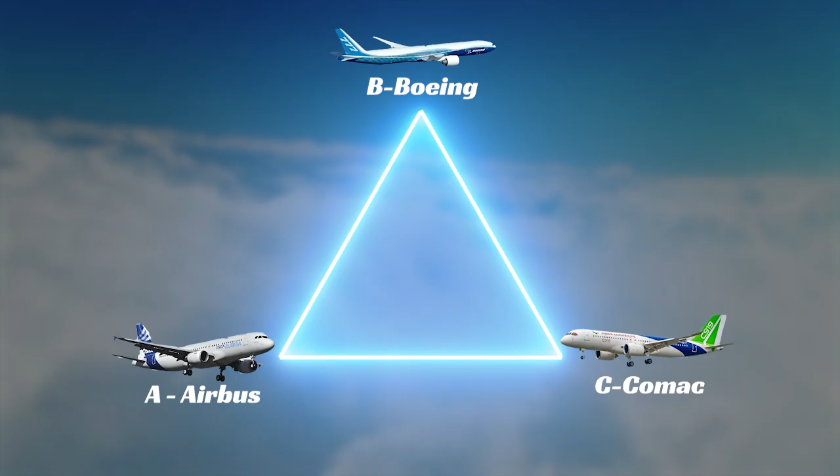China has set its sights on becoming a global powerhouse in commercial aviation, aspiring to establish COMAC, Commercial Aircraft Corporation of China, as the C in the new ABC world order, alongside Airbus and Boeing. This ambition is no longer just a vision, it's taking flight.

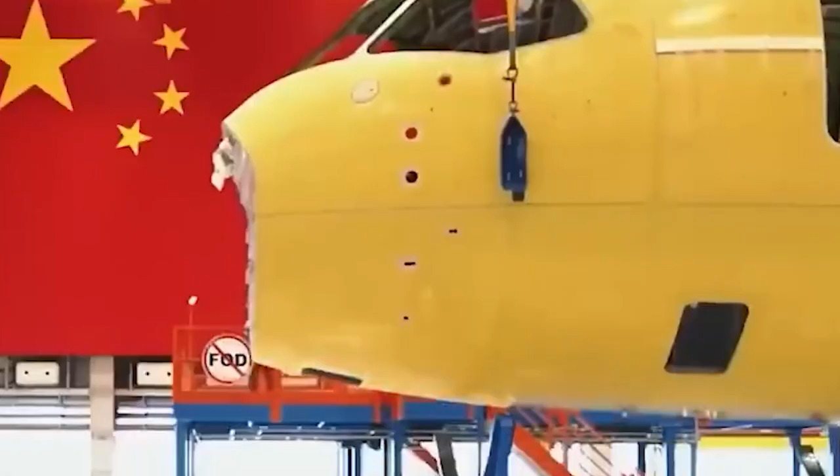The COMAC C919, a modern narrow-body airliner, designed and assembled in China, stands as a powerful symbol of this progress. Certified, operational with airlines like China Eastern Airlines, and backed by over 1,000 orders, the C919 represents a monumental achievement in China aerospace engineering and industrial capability.

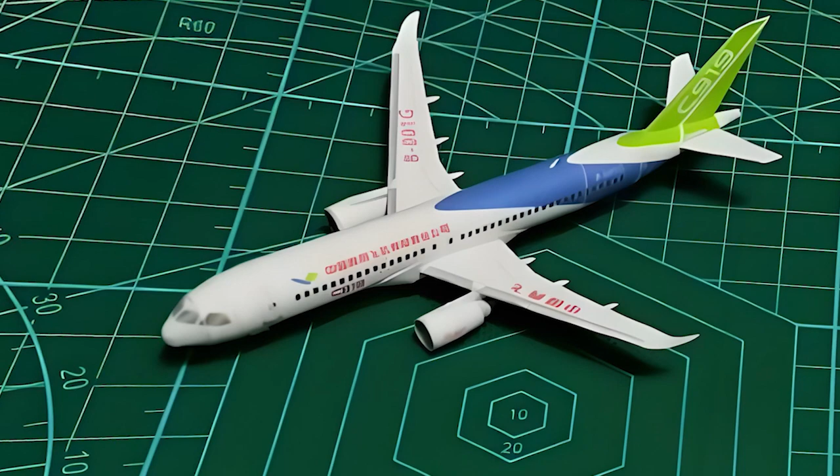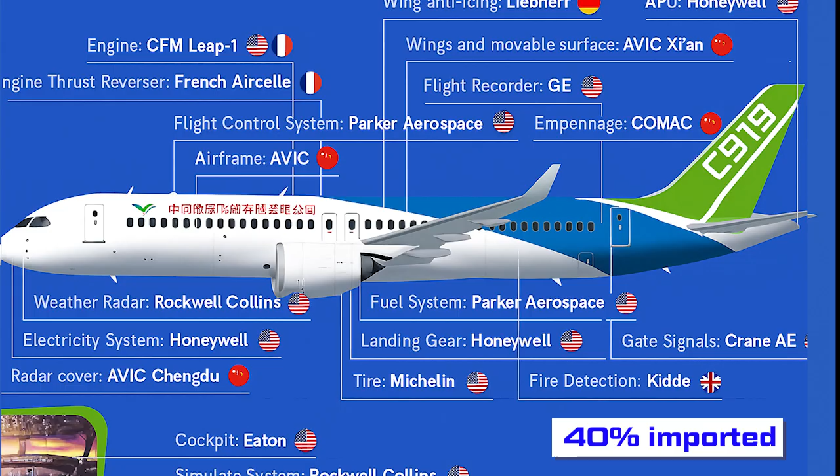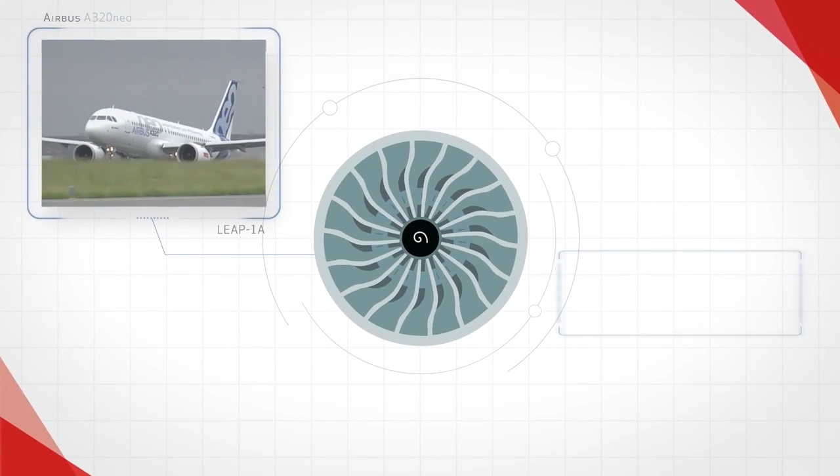Yet, beneath the triumph lay a critical flaw. While the C919 features a Chinese-designed airframe, about 40% of the model's components are imported. The C919 depends entirely on LEAP-1C engines from CFM International, a joint venture between GE Aerospace from the US and Safran Aircraft Engines from France. This strategic dependence leaves the program acutely exposed to geopolitical tensions.

In May 2025, President Donald Trump issued a ban prohibiting the export of key US aircraft engine components and technologies to China, directly targeting the LEAP-1C engines powering the C919. This move threatens to disrupt the jet production, as well as the obtaining process of international airworthiness certification.

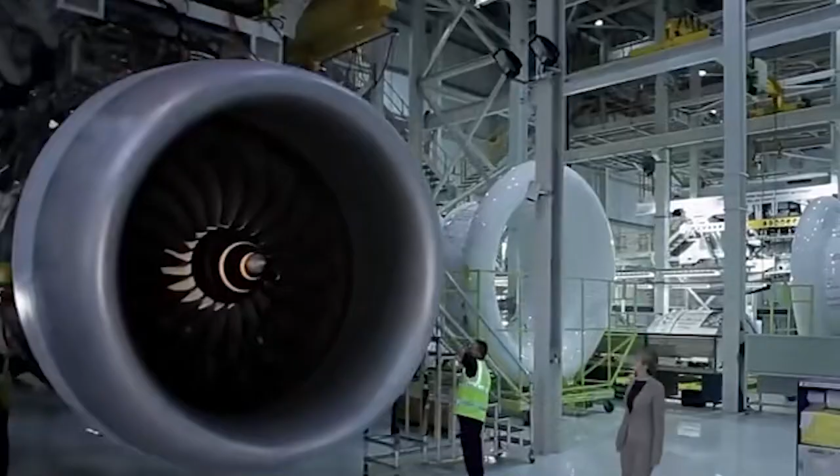But does this come as a surprise to China? The answer is no. China has anticipated this scenario from the beginning. While developing the C919, it simultaneously pursued development of the CJ-1000A engine.

The decision to initially use foreign engines was a strategic choice, one driven by several key considerations. First, there was a matter of international certification. For the C919 to succeed globally, it needed a proven Western engine. This gave it credibility from day one, making airlines far more comfortable placing orders, allowing COMAC to build a customer base and gain operational data while continuing the CJ-1000A development.

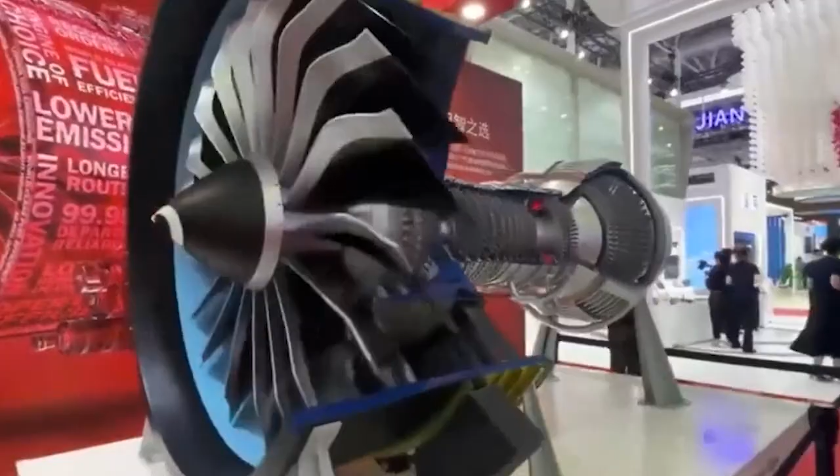Another major factor was minimizing risk. The LEAP-1C was already a mature, high-performance engine, with a proven track record on other aircraft, significantly de-risking the C919's initial entry into service.

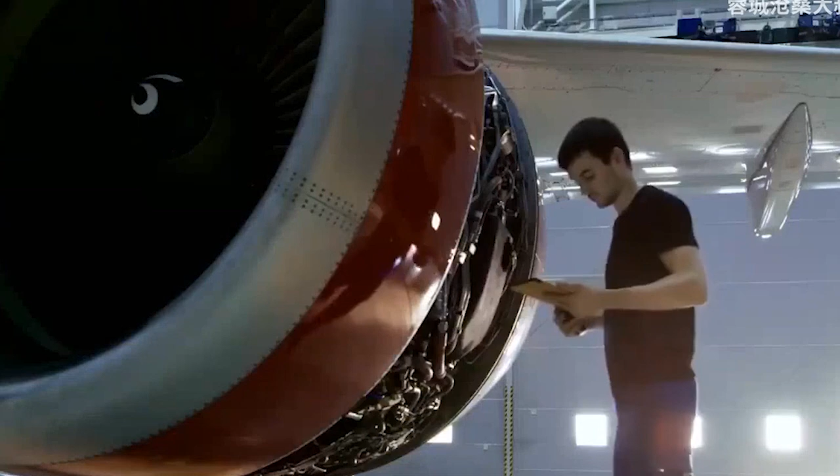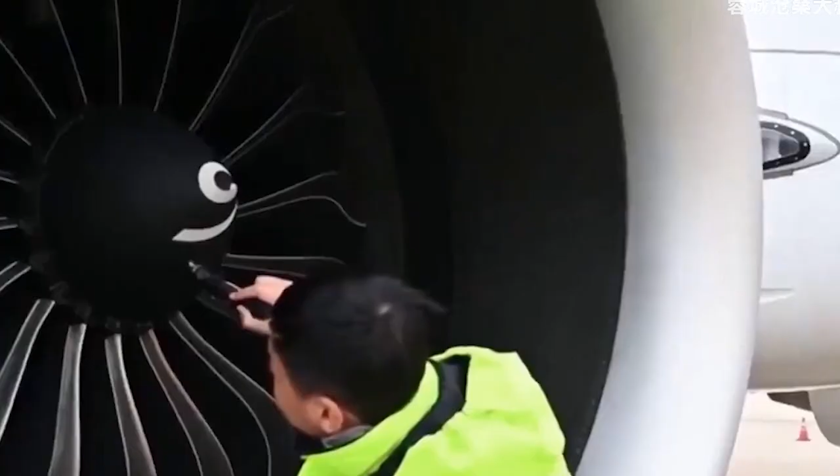There was also a long-term industrial benefit. Even without formal technology transfer, working closely with companies like CFM provided Chinese engineers invaluable exposure to the best practices in the world. This hands-on experience accelerated their own domestic engine building capabilities.

And finally, there was a geopolitical aspect. Choosing a Western engine initially helped avoid provoking the very type of trade restriction that materialized in May 2025. Contrary to common beliefs that China is dependent on foreign technology, importing foreign engines represented a rational choice within a broader commercial and strategic roadmap towards self-sufficiency, not a lack of alternatives.

So, how far along has China come? Let's take a look at the progress of the two engines, the CJ-1000A for the C919 and the CJ-2000 for its larger sibling, the C929.

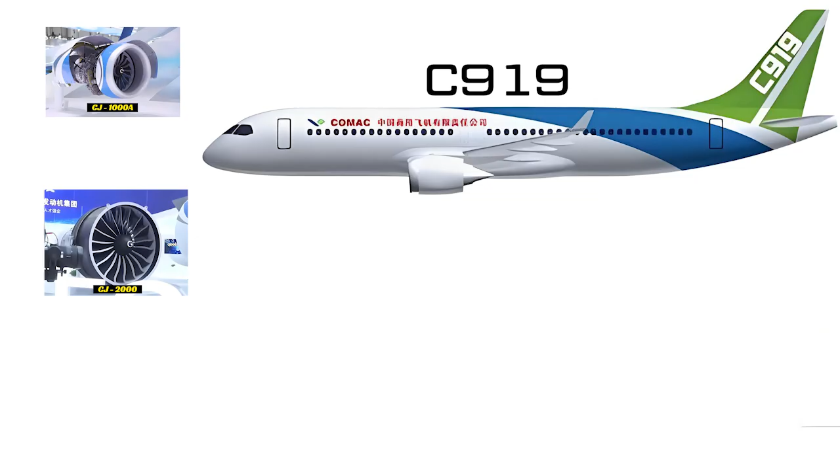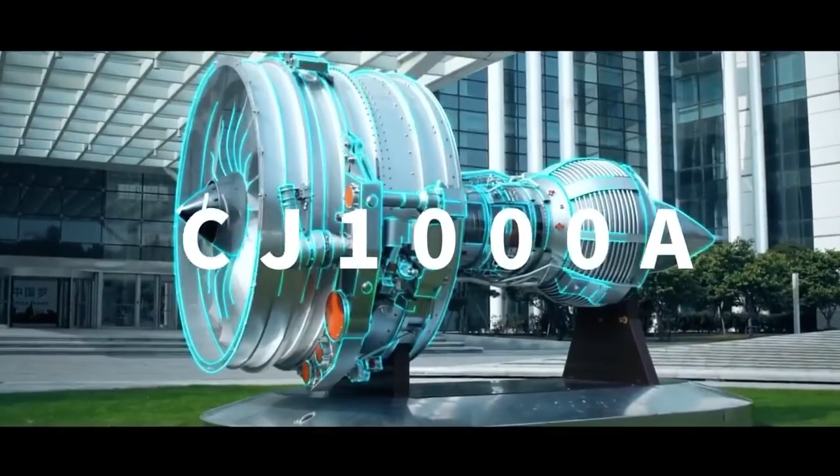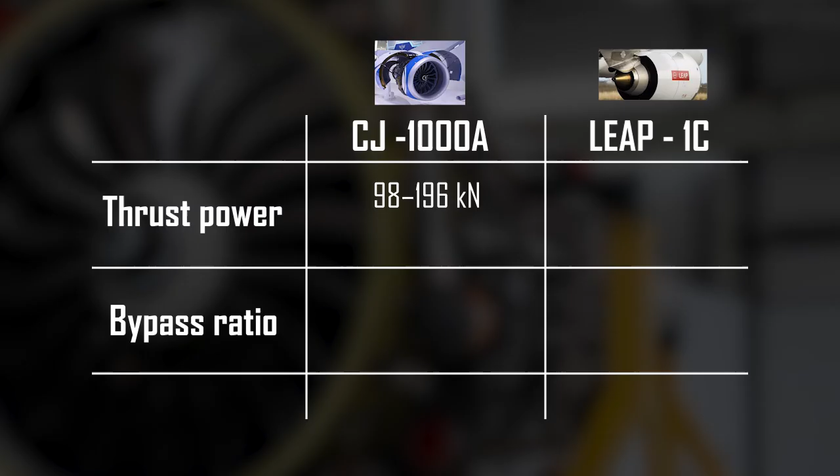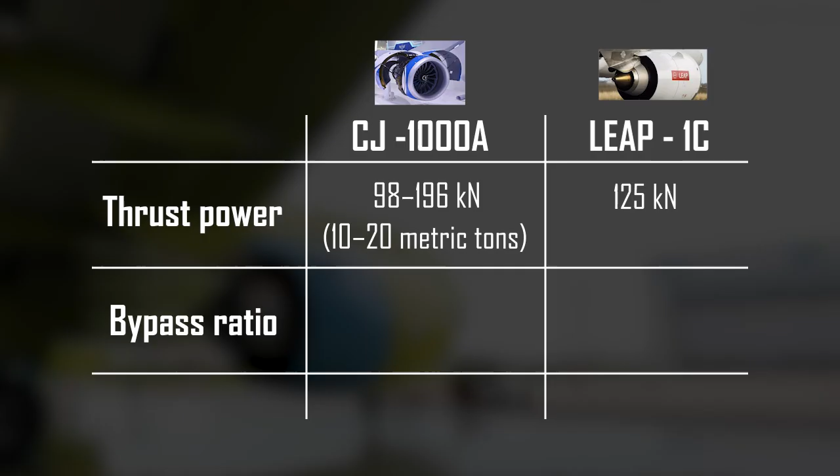The CJ-1000A is China's first domestically developed large high-bypass turbofan jet engine, capable of generating from 98 to 196 kN of thrust, around 10 to 20 metric tons, placing it in the same class as LEAP-1C, with the 125 kN of thrust, approximately 12.75 metric tons. The CJ-1000A has a bypass ratio of 10:1, compared to the LEAP-1C 11:1.

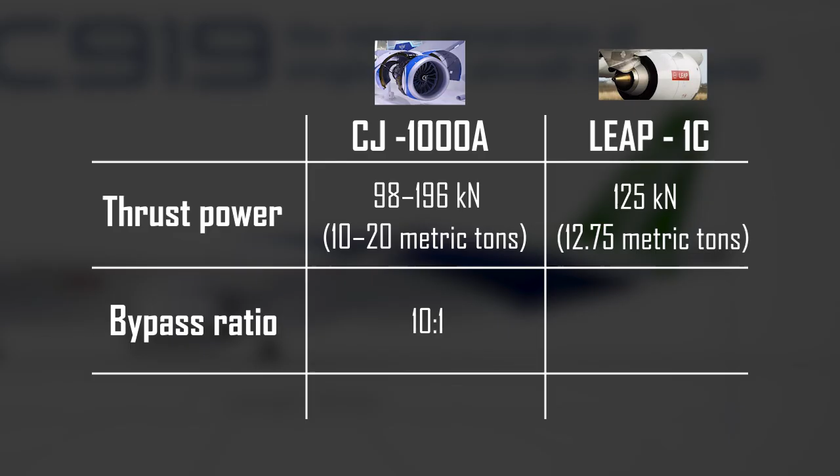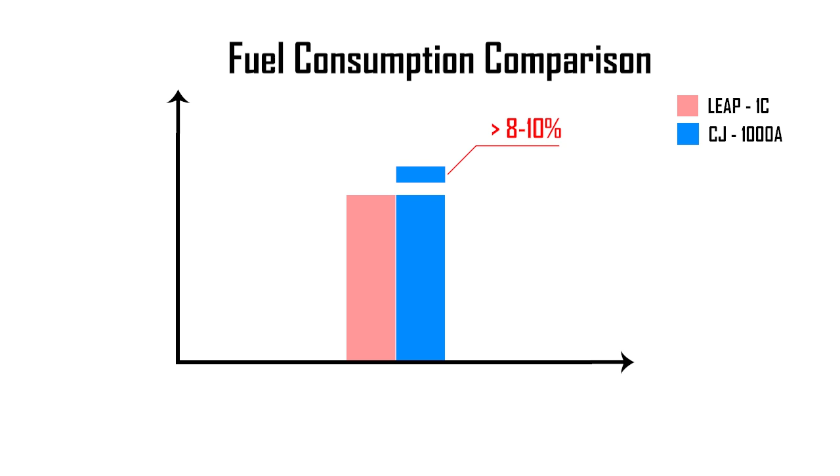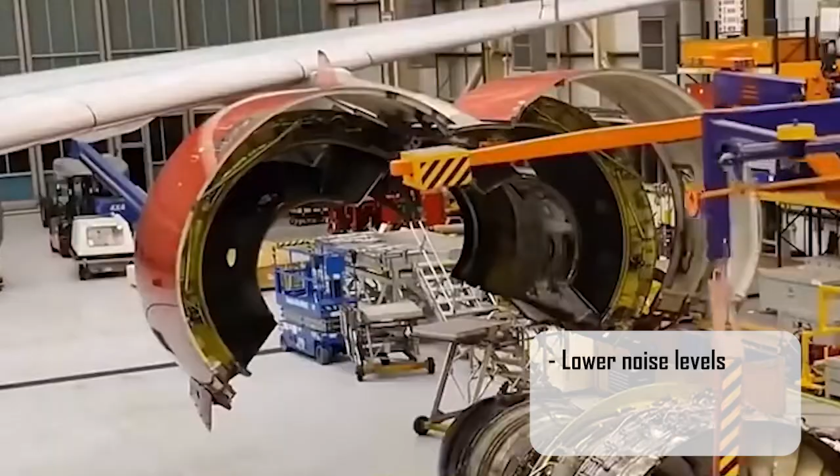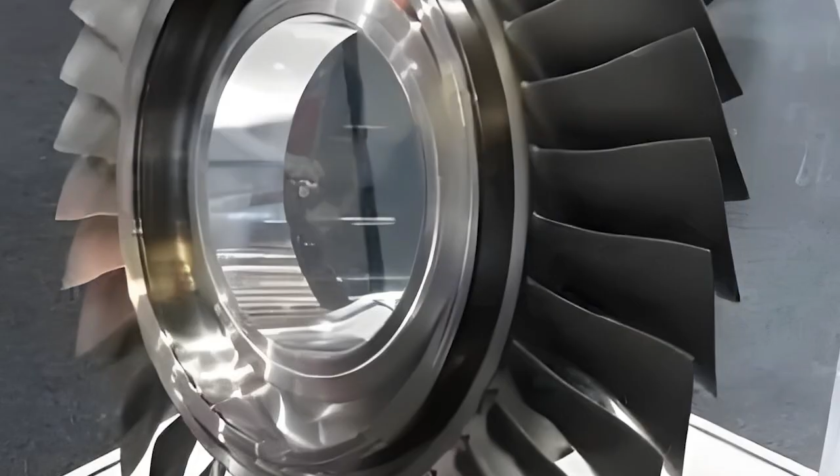While a higher bypass ratio typically improves fuel efficiency, the CJ-1000A fuel consumption remained approximately 8 to 10% higher than the LEAP-1C due to its earlier development stage. However, it achieved lower noise level through advanced acoustic liners and optimized fan design. Key parameters like thrust-to-weight ratio and noise control approach international standard, with notable progress in single crystal turbine blades and FADEC full authority digital engine control systems, technology that were once strictly embargoed by the West.

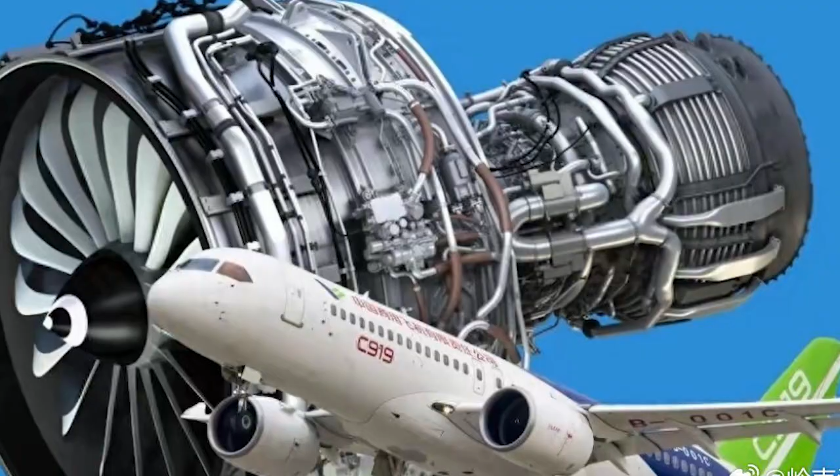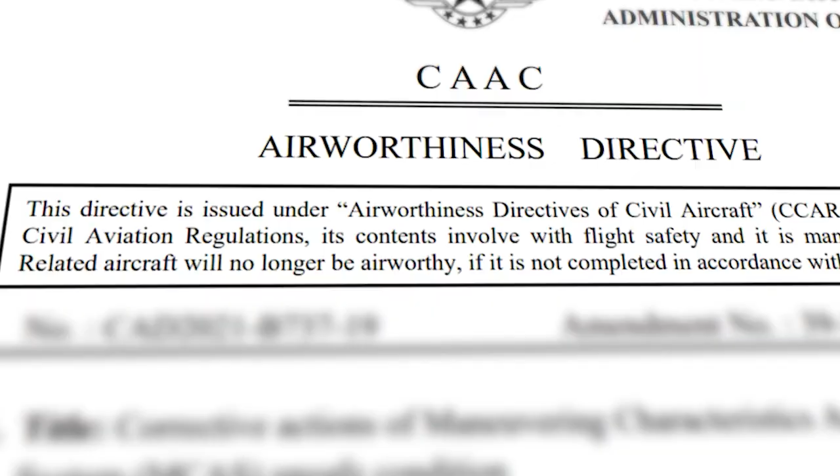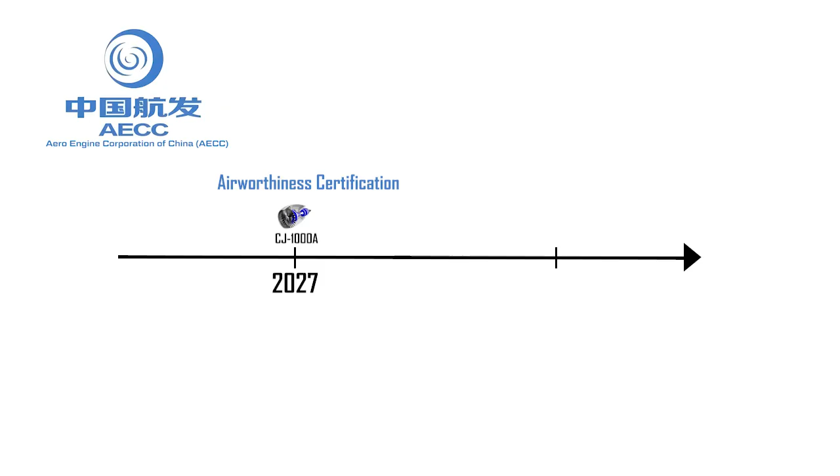According to domestic media reports, the CJ-1000A has passed the Civil Aviation Administration of China's certification, or the CAAC certification, production license, and individual aircraft airworthiness testing. It is now in the final stage of the airworthiness certification. Some core components have reportedly operated without failure for over 1,000 hours. AECC expects the CJ-1000A to receive the certification by 2027 and enter commercial use by 2030.

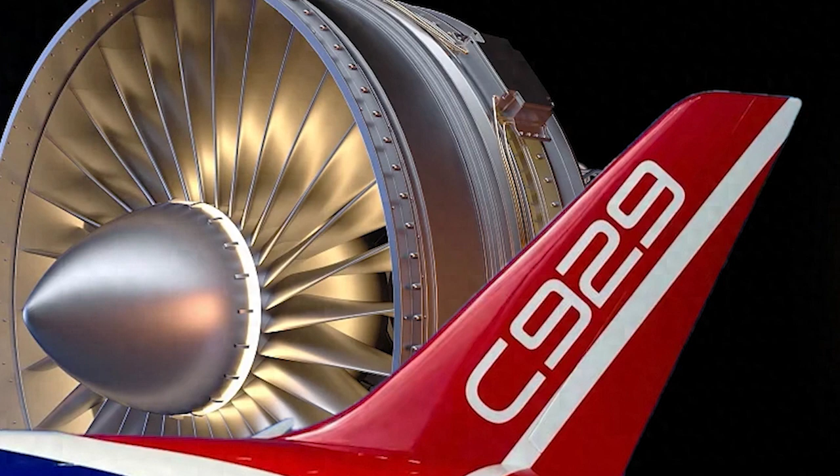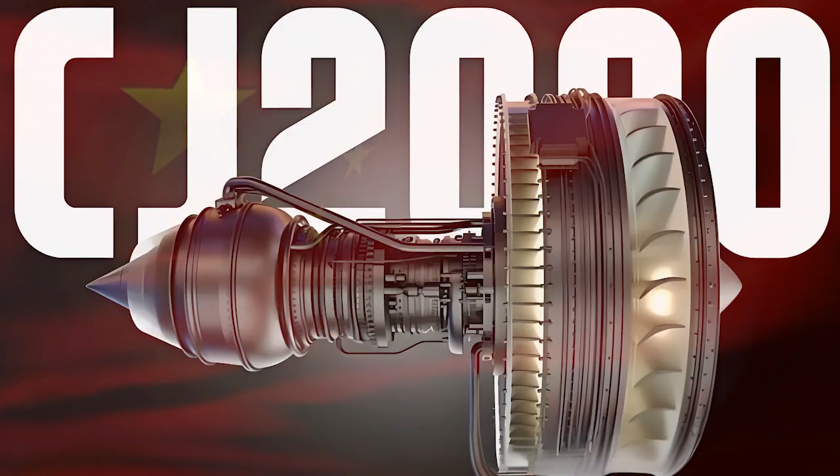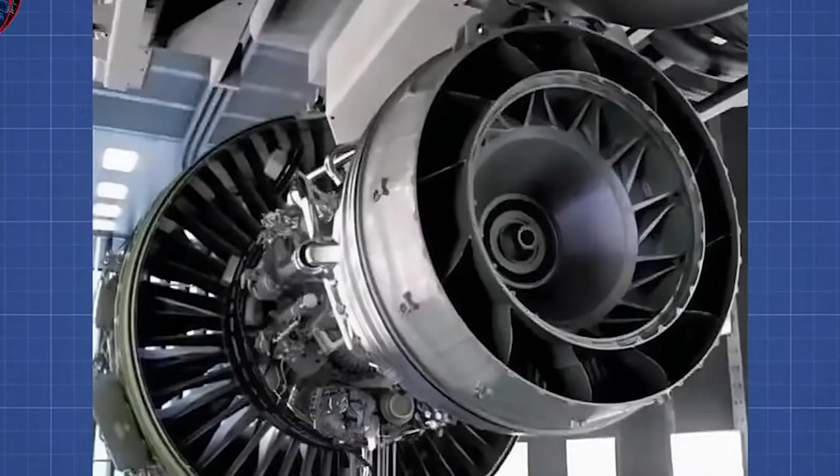Beyond the CJ-1000A, China's CJ-2000 aviation engine has achieved pivotal breakthroughs, where the CJ-1000A resolved critical supply chain vulnerability. The CJ-2000 represents China's declaration of readiness for head-to-head global competition. The CJ-2000 engine is China's first large, high-bypass turbofan engine, developed entirely domestically.

It is designed to power the C929, a twin-aisle aircraft capable of carrying up to 440 passengers, with a maximum range of 12,000 kilometers, roughly equivalent to the distance from Shanghai to New York. The C929 is intended to compete with the Airbus A350-900 and the Boeing 787-9 Dreamliner on long-haul routes.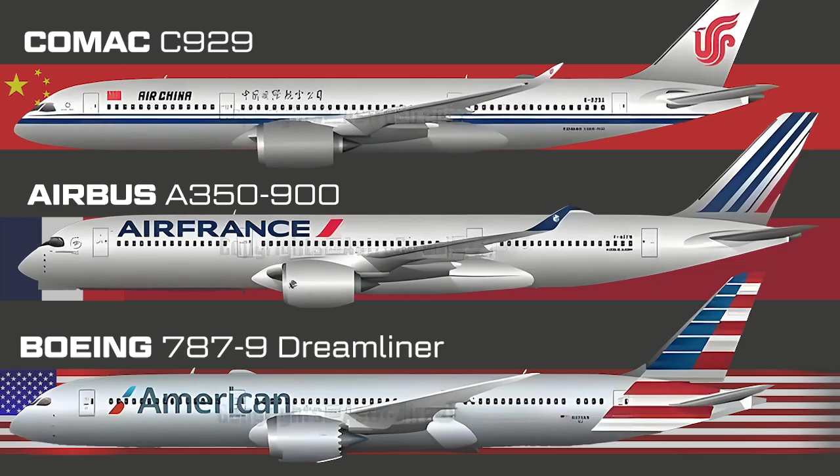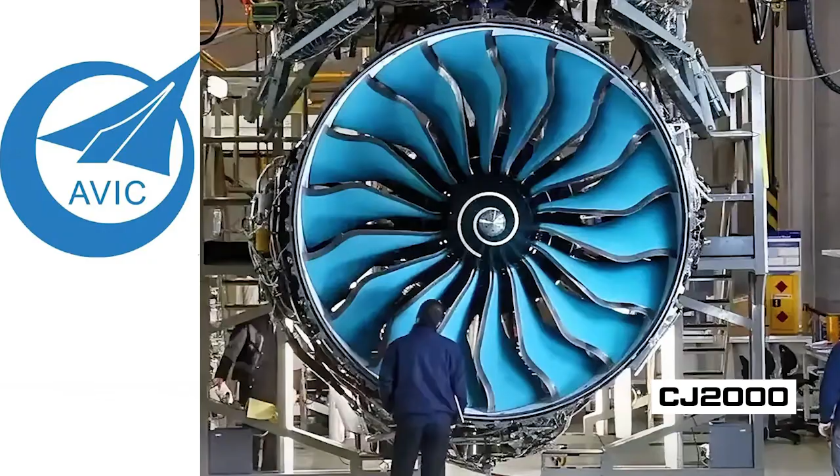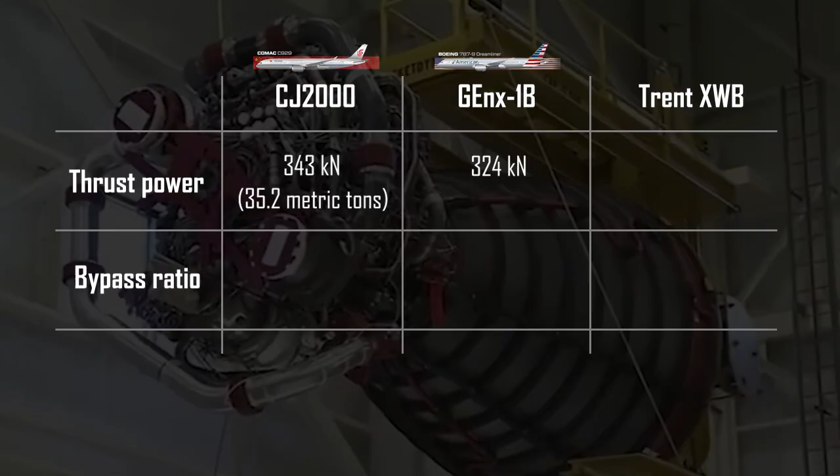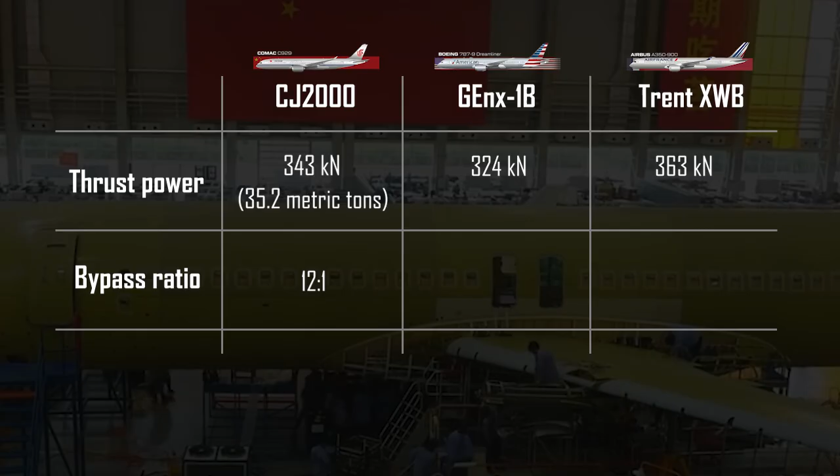In February 2025, the Aviation Industry Corporation of China, AVIC, announced that the CJ-2000 has successfully completed a rigorous 3,000-hour endurance test. By generating 343 kN or 35.2 metric tons of thrust, the CJ-2000 surpasses the GEnx-1B engine of the Boeing 787 and approaches the output of the Trent XWB engine of the Airbus A350. Its industry-leading 12:1 bypass ratio outperforms both of the Western engines, delivering superior fuel efficiency alongside competitive power.

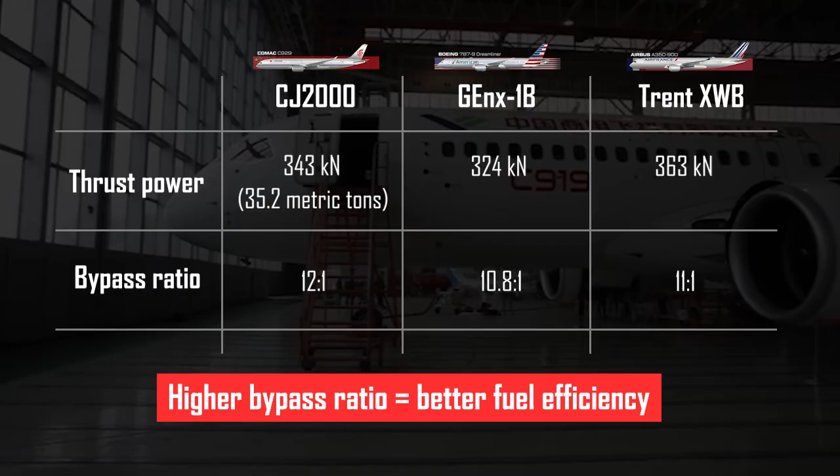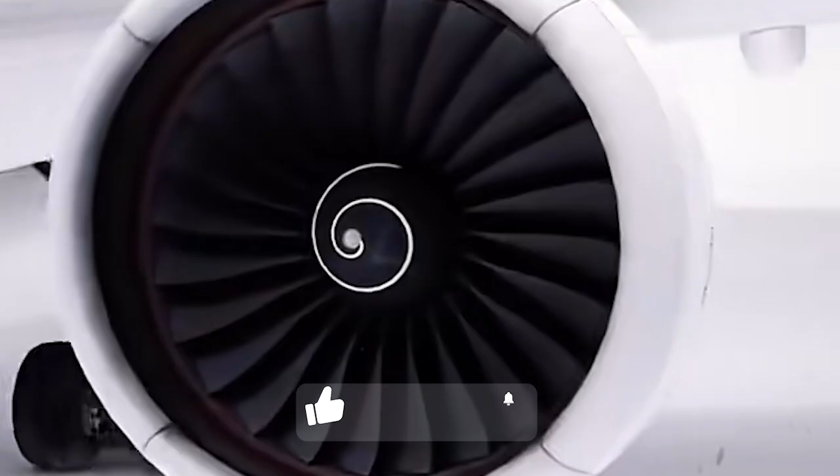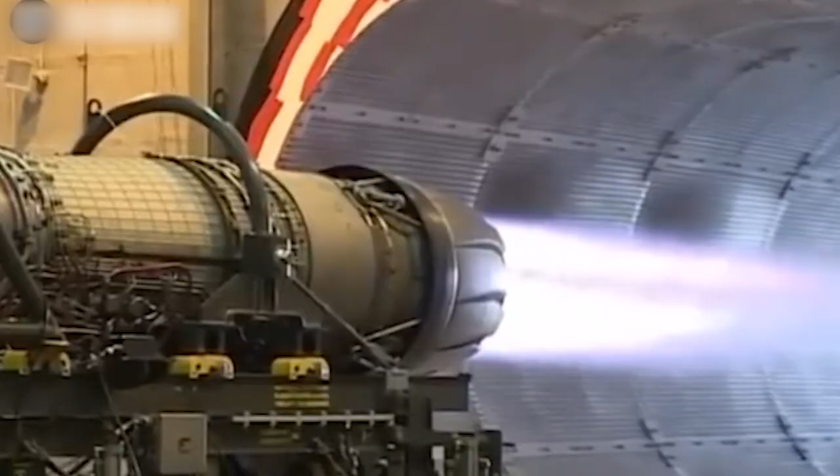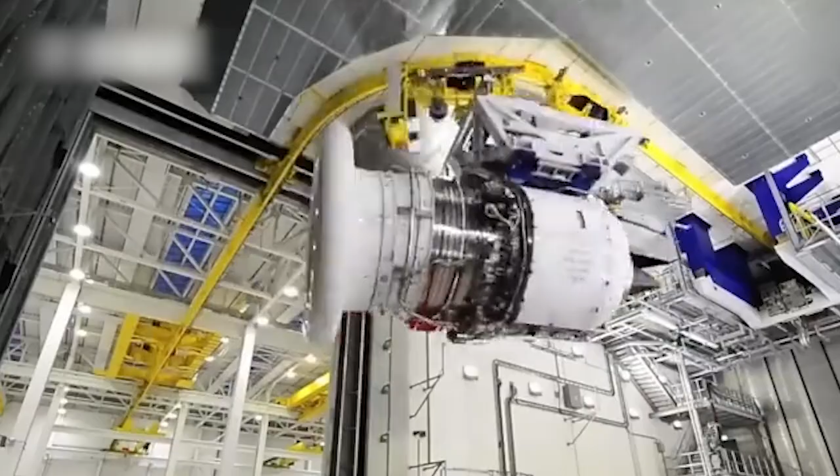However, the CJ-2000's most critical breakthrough is its turbine blade technology. For decades, China's jet engines relied on imported turbine blades, components enduring temperatures hotter than volcanic lava while spinning at supersonic speed. These foreign blades arrive at a staggering 30% defect rate, causing frequent failures, grounding aircraft, and exposing China's aviation ambitions to the mercy of global suppliers.

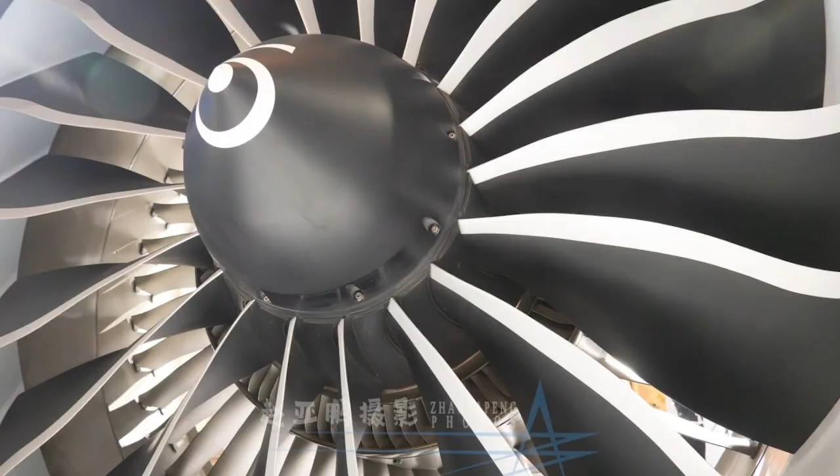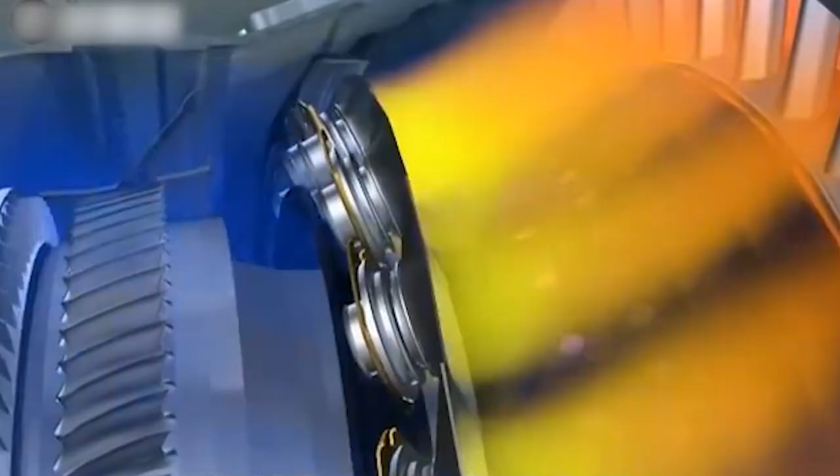The CJ-2000 engine changes everything. Its domestically developed high-performance blades, forged from single-crystal superalloys and protected by advanced thermal barrier coatings, operate reliably at temperatures as high as 1700 degrees Celsius, a staggering 200 degrees hotter than their predecessor. This extreme heat tolerance is revolutionary.

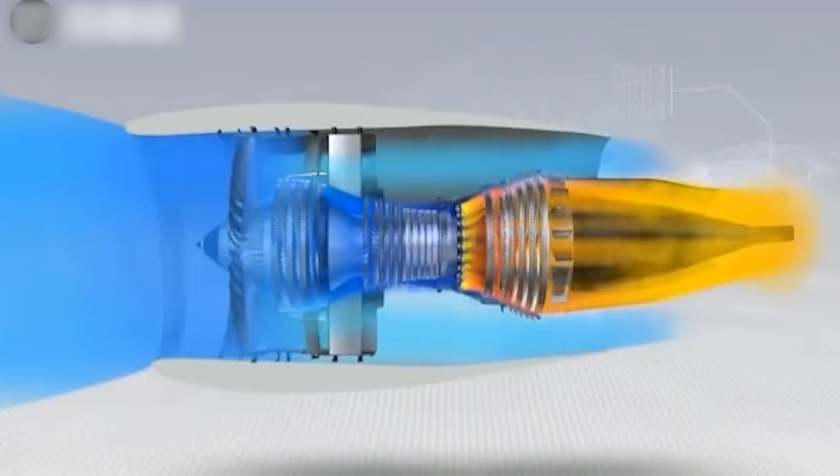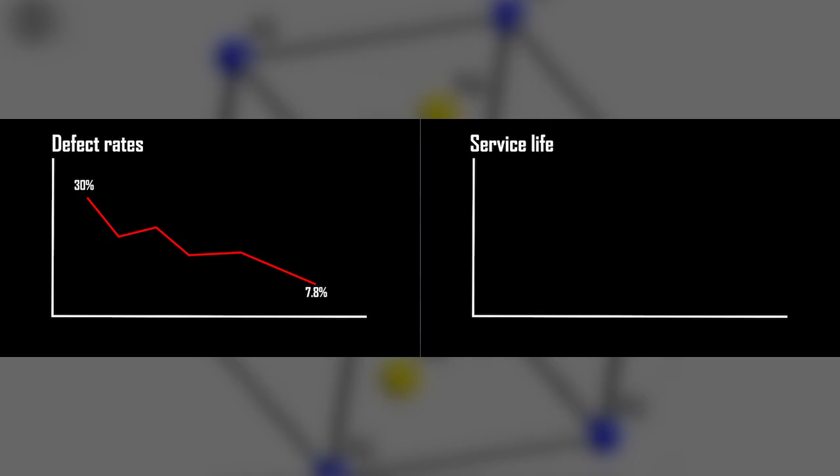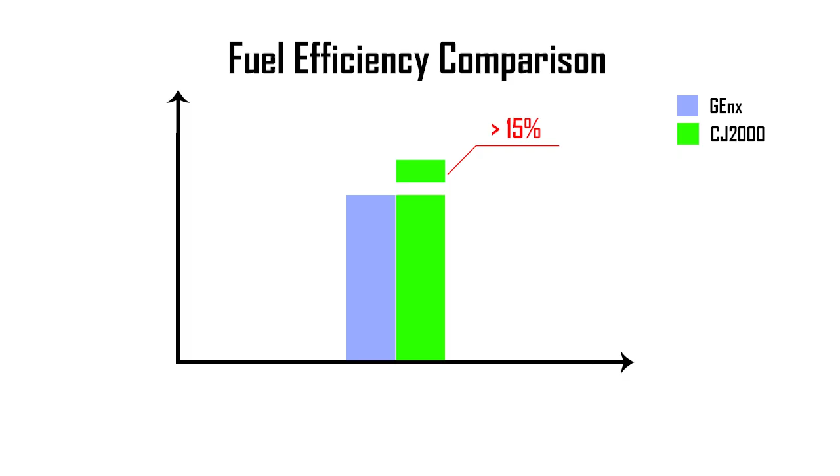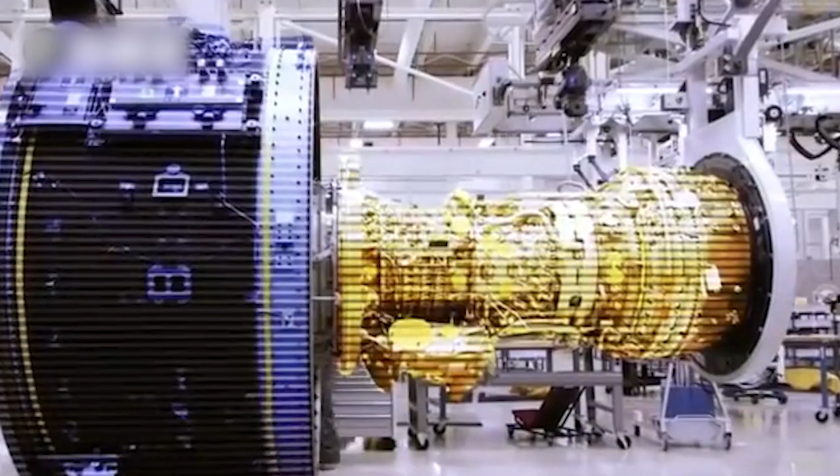It has slashed defect rates from 30% to just 7.8%, while extending service life by more than 80%. According to Aviation, the CJ-2000 now offers 15% better fuel efficiency than the GEnx engine on the Boeing 787. With this level of thermal resilience, these blades maintain precision even under extreme weather conditions. And thanks to their extended lifespan, maintenance costs are reduced by millions per aircraft annually. The gap between CJ-2000 and leading global engines is now minimal, and in some areas, the CJ-2000 even surpasses them.

The success of the CJ-2000 marks not only a breakthrough in engine technology, but also signals China's imminent development of the globally competitive wide-body aircraft, the C929.

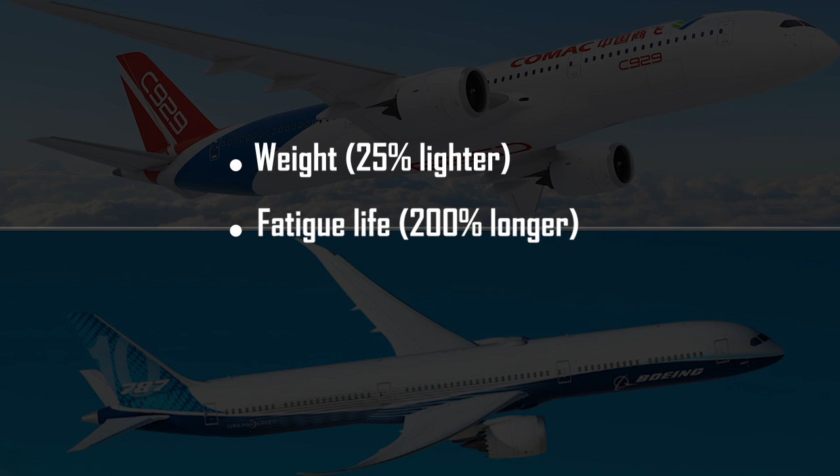The C929 outperforms the Boeing 787 in key metrics: 25% lighter, triple the fatigue life, and has a 60,000-hour lifespan compared to the 44,000 hours on Boeing 787. This means the C929 has longer, narrower wings that generate less drag, giving it better flight efficiency than the Boeing 787. But what makes the C929 truly revolutionary is not just the performance.

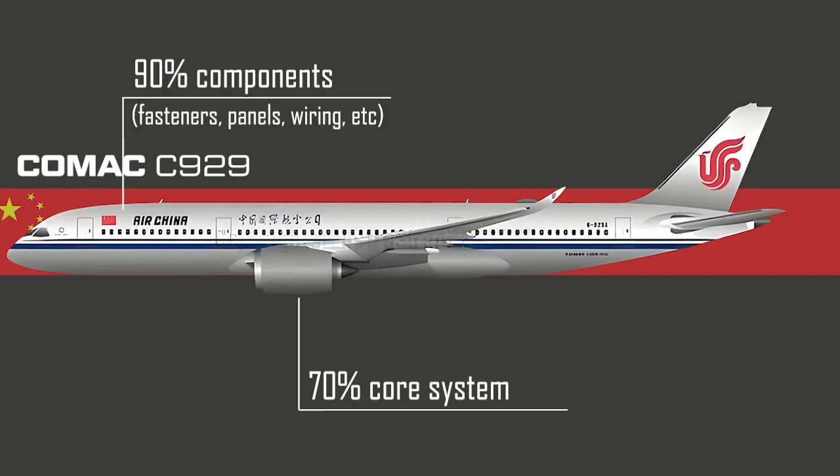It's the fact that 90% of the components, including basic parts such as fasteners, panels, wiring, etc., and 70% of the core system, such as the engines, avionics, and landing gears, are now made in China.

According to the South China Morning Post, a COMAC executive informed partners at the 2025 Paris Air Show that the C929 is expected to receive domestic certification by 2032.

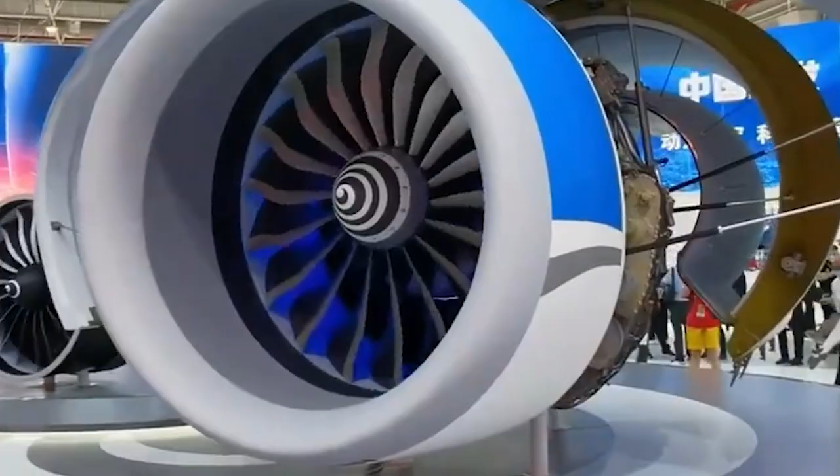While the trade ban may disrupt C919 production in the short term, it has ultimately accelerated China's aviation independence. Even so, challenges remain. The CJ-1000A must achieve CAAC certification by 2027, with international approval from EASA and FAA potentially extending to 2030. By the time the CJ-1000A completes this lengthy process, its market competitiveness against next-generation Western engines would face serious challenges. Similar certification hurdles await the CJ-2000 of the C929.

Yet, a pivotal shift is underway. For the first time, China isn't merely catching up, it is forging its own path in aviation.

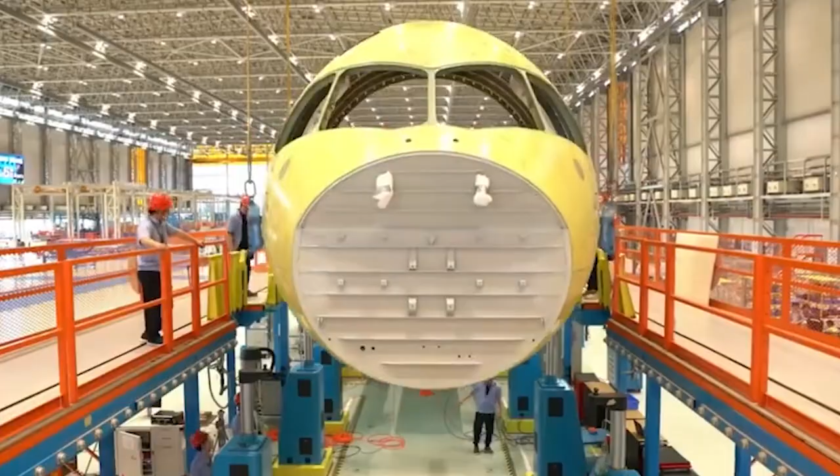Beyond countering US export controls, this engine advances a more profound mission: building an end-to-end domestic aviation ecosystem. Each turbine blade, forged and test cleared, represents another step toward a self-sustaining aerospace industry, where China no longer requests permission to fly, but sets the standard for how the world takes wing.